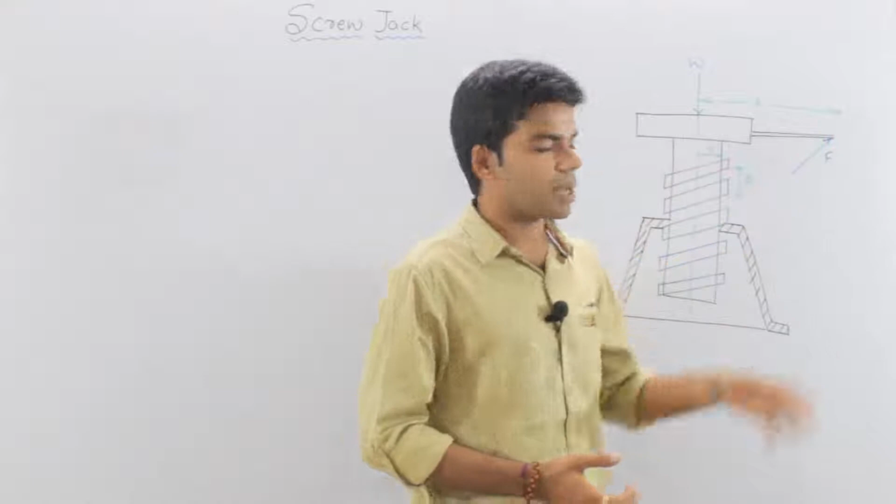So what actually is the screw jack and how is it working? We have a screw obviously, and these are the threads of the screw. We have a lever here and we are applying a force on this lever. So this screw will be turned and as a result, this will be lifted up, this will advance in axial direction in order to lift the load W.

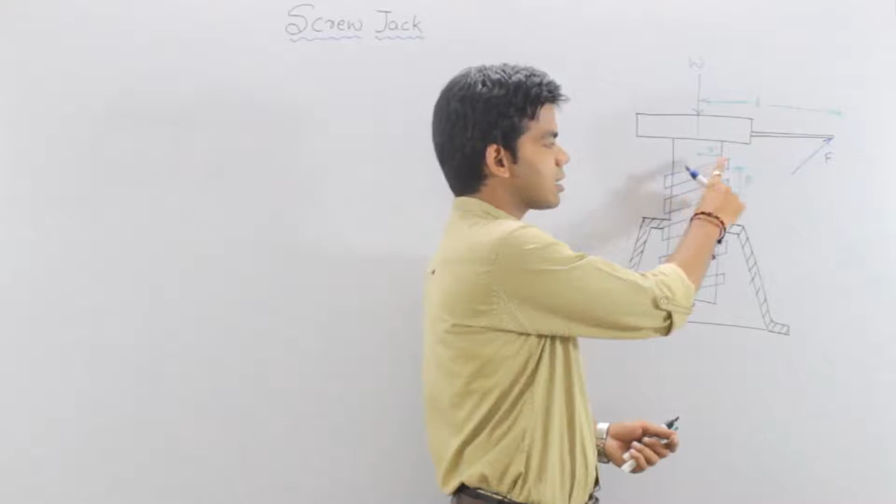Suppose the mean radius of this screw is small r, and the pitch of the screw is P. Now what actually is the pitch of the screw? The distance between the two threads is nothing but the pitch.

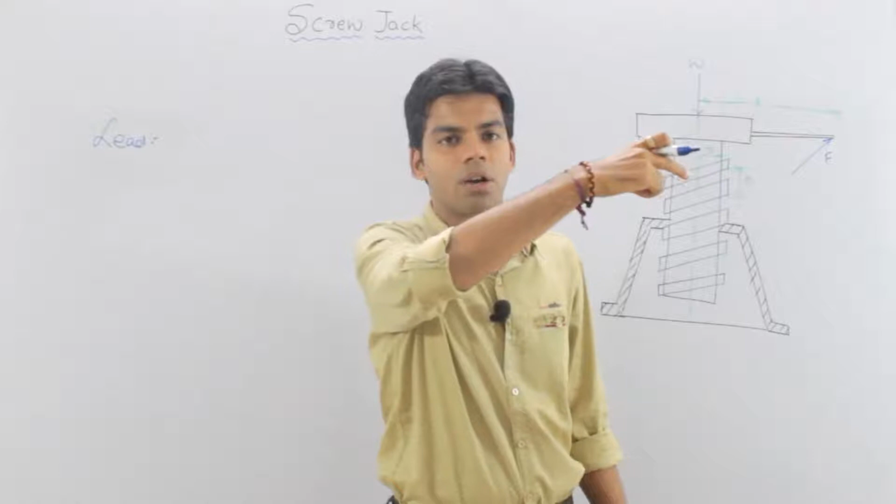There is another term called lead of the screw. These are two different terms. This term lead is often confused with pitch, but both are not the same. Lead is the axial advancement of the screw with one complete rotation of the screw. That means if I rotate this by a complete one rotation, 360 degrees, how much this screw will advance in axial direction, upward or downward, that is nothing but the lead.

Now you would say that the same thing is the pitch. Pitch is actually the distance between the two threads, and in case of a single headed screw, single start threads means a single thread is wrapped all over the screw. We also have a double start thread and single start thread, as we call them.

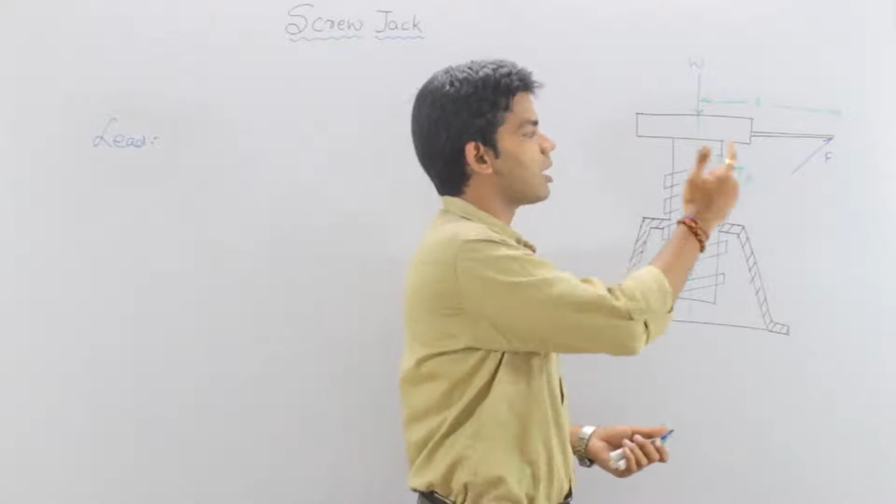In a double start thread there are two threads which are wrapped over the screw. In a single start thread only a single thread is wrapped over the screw. So in case of single start thread, this pitch will be equal to lead. Why? Because if I turn this by one complete rotation, the screw will advance in axial direction by an amount equal to one pitch, as I told you previously.

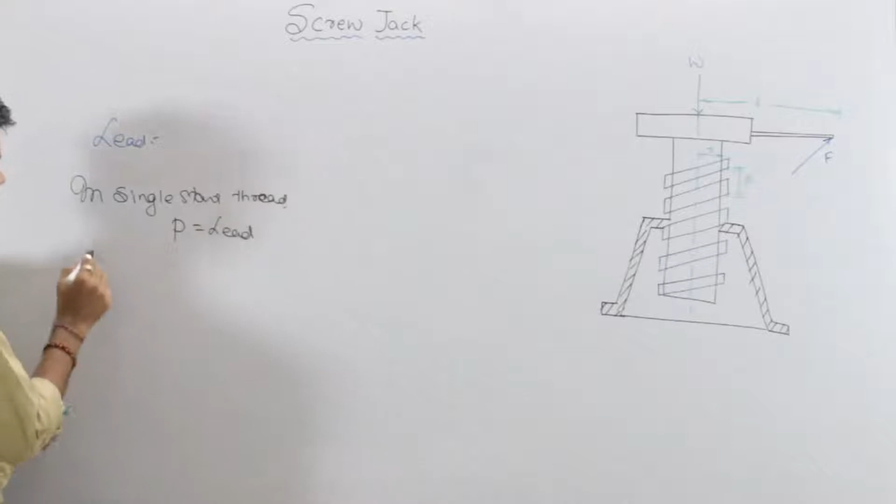But if we have a double start thread, then the total advancement of the screw in axial direction is nothing but 2 times the pitch, because there are two different threads. So in single start thread, pitch is equal to lead, and in double start thread, lead is equal to 2 times the pitch, not just the pitch.

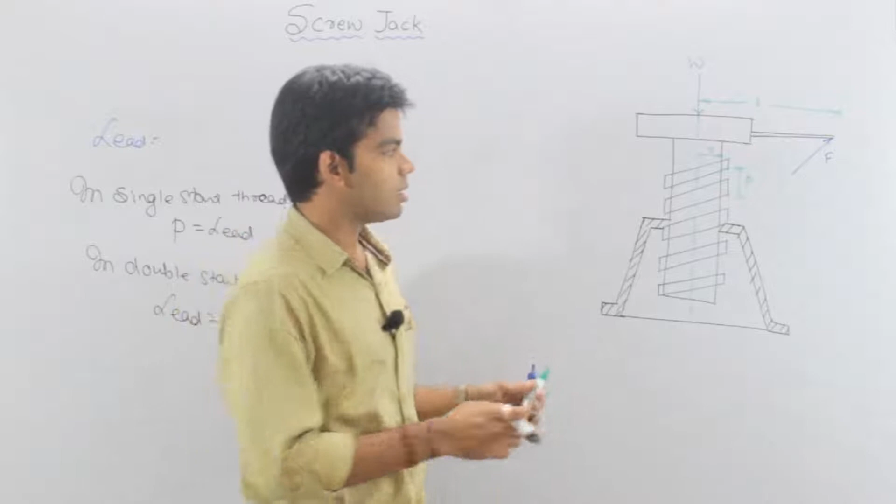Getting this or not? Now this screw jack works on the principle of inclined plane. If you can see here, we just have the inclined plane, and we are raising the weight with the help of this inclined plane only. So if I draw the free body diagram with this inclined plane, we have an inclined plane at an angle theta, and this theta is actually called the helix angle of the thread.

Theta is nothing but the helix angle of thread. So we have this inclined plane which is inclined at an angle theta, which is the helix angle, and we have a weight, suppose W, on this particular plane.

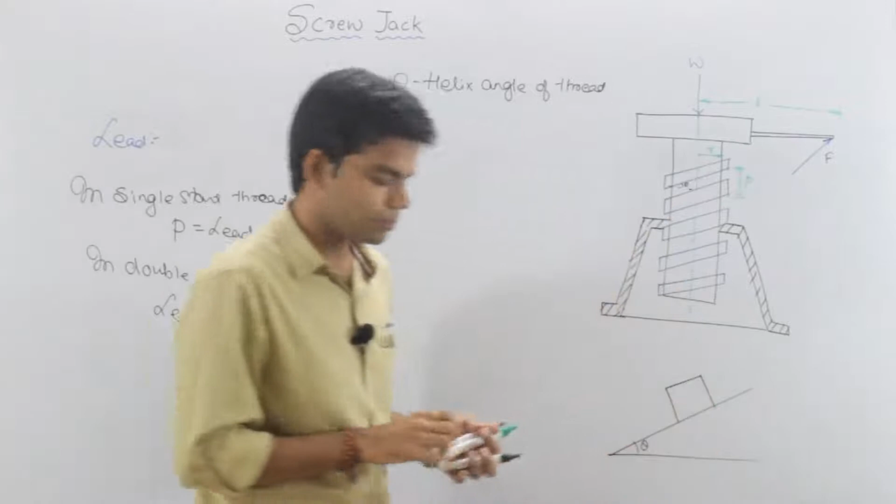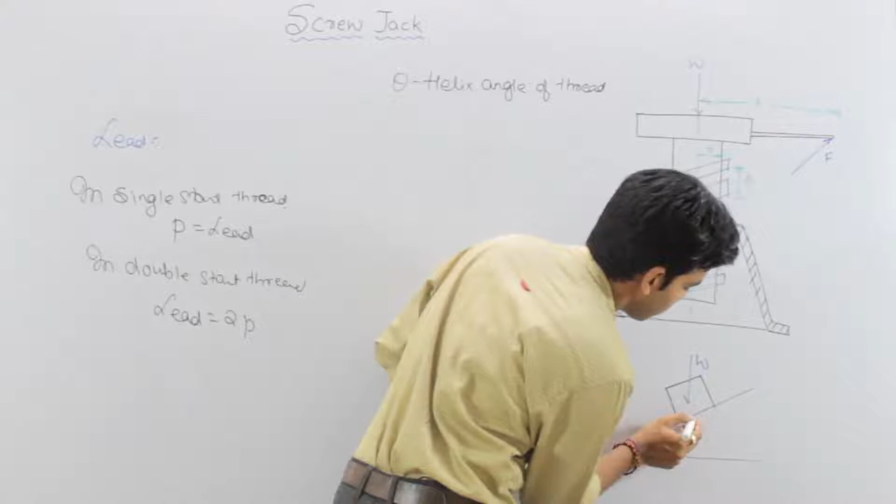W weight is acting. Now if I draw the free body diagram, the weight is acting vertically downward. The normal reaction will act normal to this plane, suppose N.

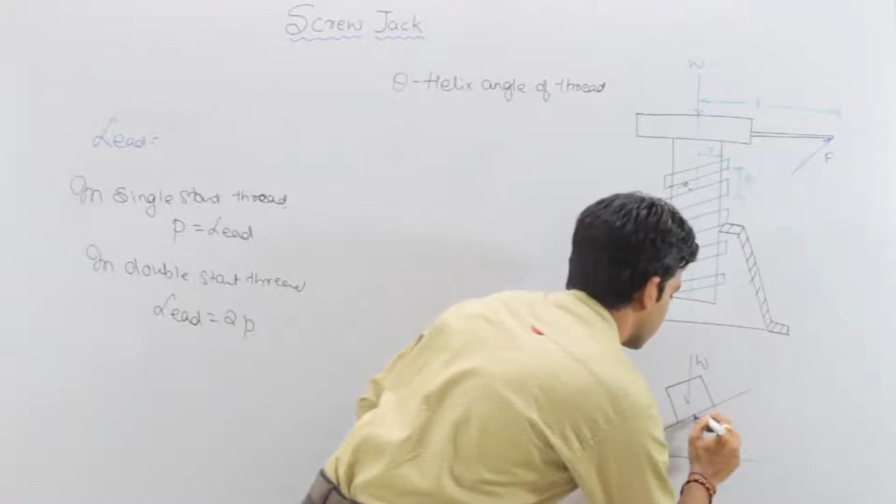And if the weight is advancing in upward direction, if we are lifting the weight, so the weight is getting lifted, so friction force will act in opposite direction. The magnitude will be equal to mu into N.

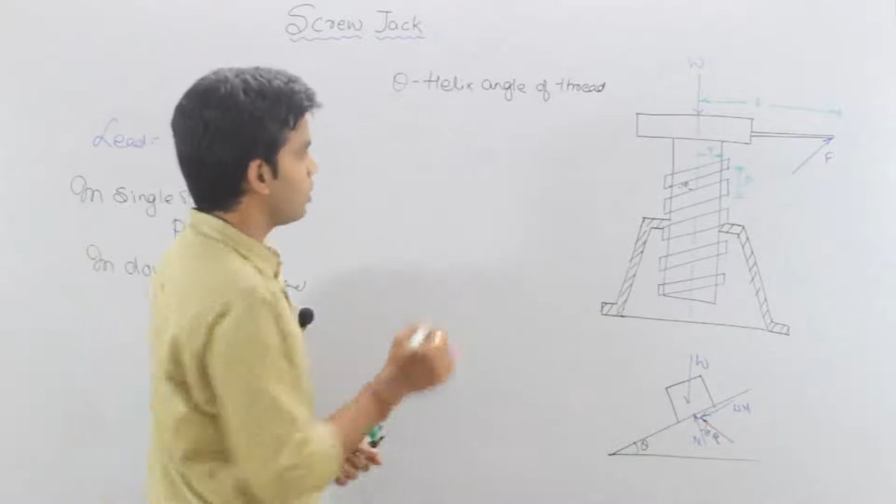And the resultant of these two, that means mu into N and N, the resultant of these two is nothing but R. And the angle which this R makes with the normal is nothing but phi, and we know that tan of phi is equal to mu, which is the coefficient of friction. We have already studied all these things in the friction unit. Or you can say phi is equal to tan inverse of mu.

Now apart from this, we are applying a force in horizontal direction.

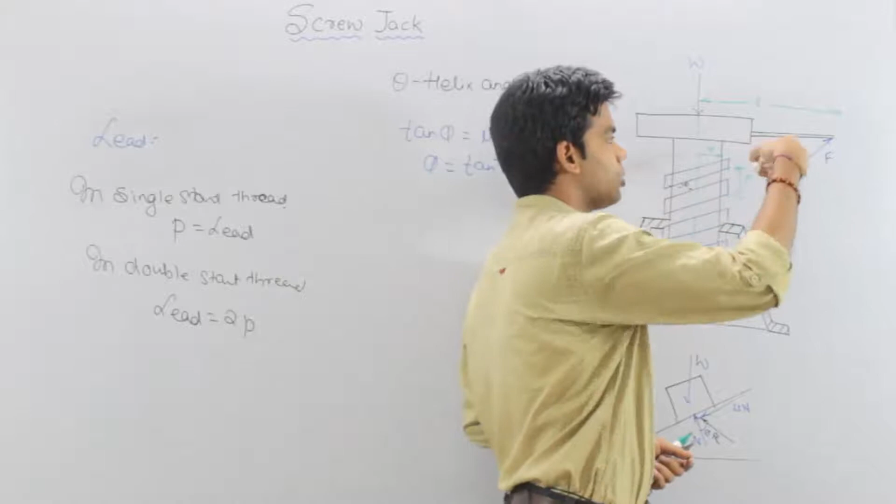If I consider the same force F at this particular radius r, let's suppose that force be P, let's suppose this force be P1.

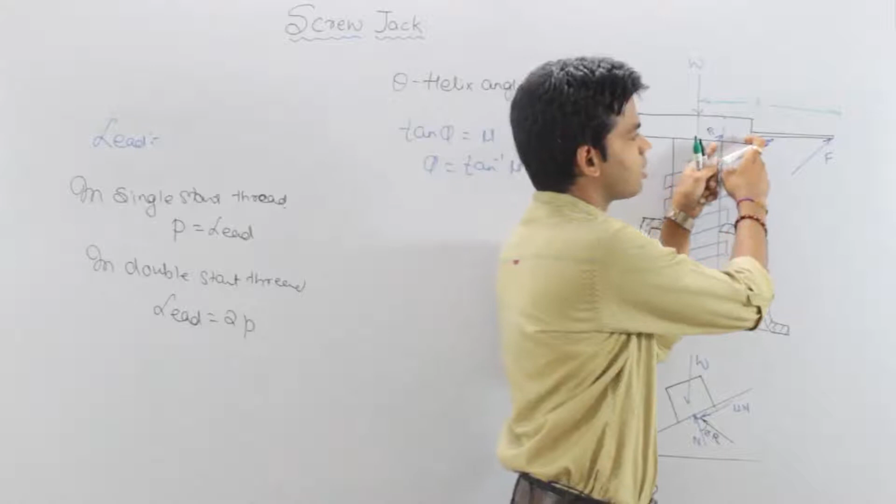I have just put a lever here and I am applying a force F so that the force be reduced. But actually the screw jack is only this much, so if I am applying a force here, suppose that force be P1. If I want to determine the value of this P1, this is simple to determine.

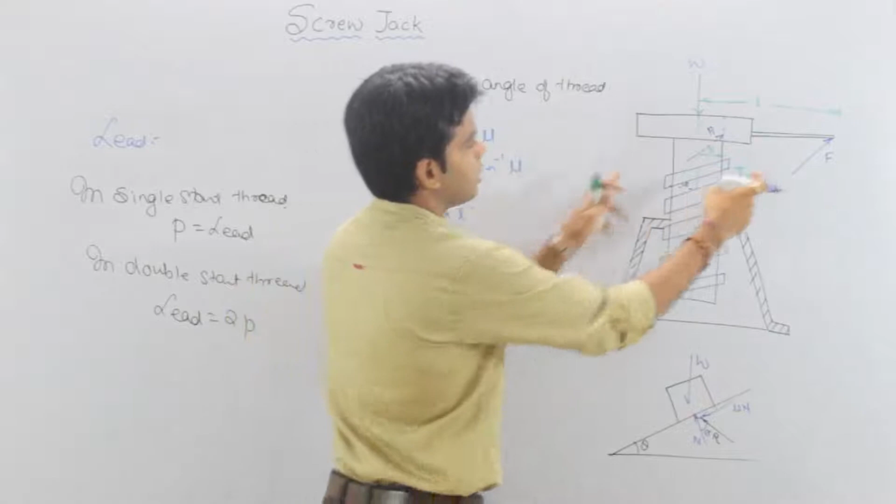So total moment about center is equal to F into L, and this should be equal to P1 into R.

The moment for both these forces should be equal. That means F into L should be equal to P1 into small r, or you can say from here P1 will be equal to F into L upon R.

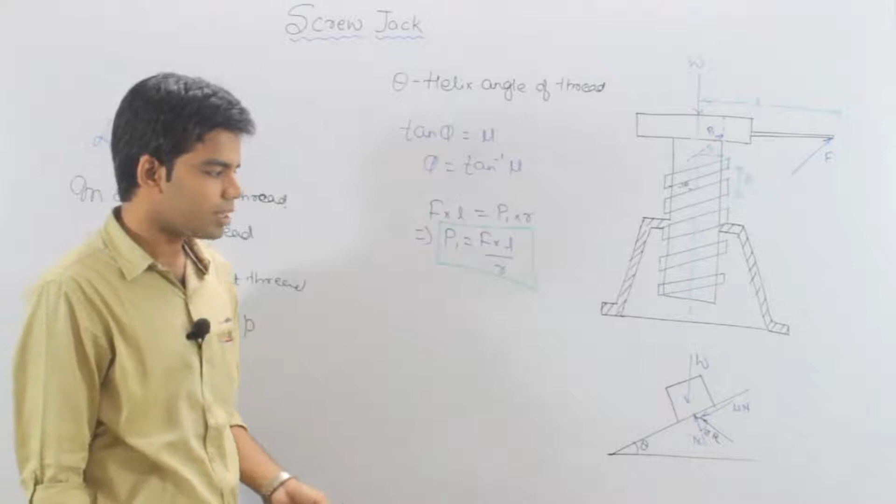So this is the value of the force if it is applied on the screw jack only. F is the force which is applied on the lever, P1 is the force which is applied on the screw jack. So we have one force also P1 which is acting in the horizontal direction like this.

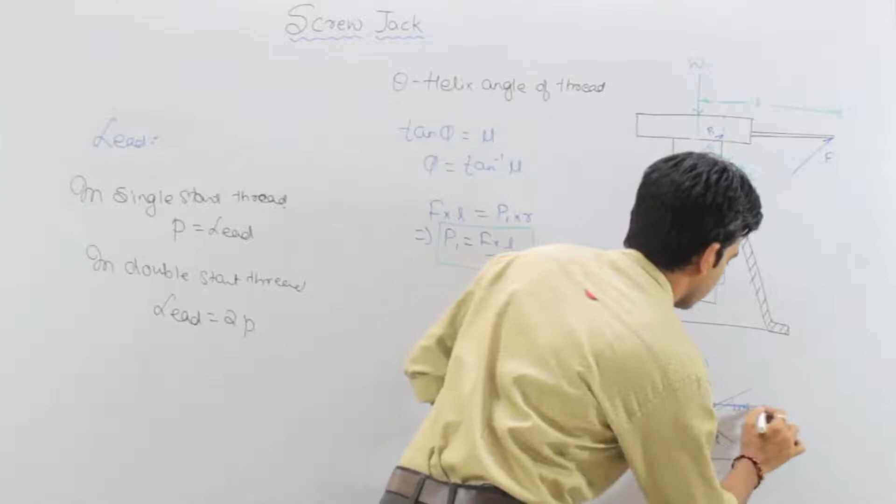This force P1 is acting in the horizontal direction like this. Now applying equilibrium equation.

Summation of Fx is equal to 0 and summation of Fy is equal to 0. Now what does summation of Fx is equal to 0 suggest? Now just look at here carefully.

This angle is theta, that means this plane is making an angle theta with horizontal. So the perpendicular plane, which is normal reaction, this will make an angle theta with the vertical. If this angle is theta, this angle will be theta.

Now what is summation of Fx is equal to 0? In this direction a force P1 is acting, in this direction a force R sine of theta plus phi is acting. This R will have two components, horizontal and vertical. Vertical component will be equal to R cos of theta plus phi, horizontal component will be equal to R sine of theta plus phi.

That means this P1 will be equal to R sine of theta plus phi. Summation of Fx is equal to 0.

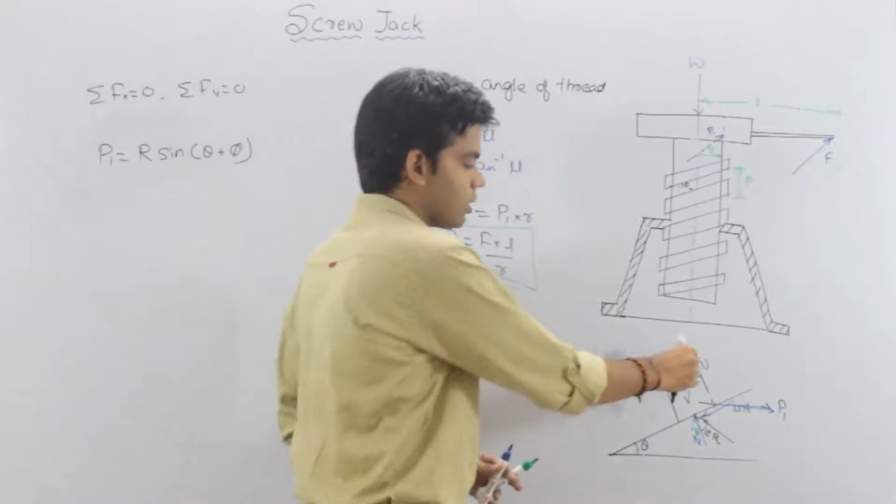Similarly, applying summation of Fy is equal to 0. We have W weight acting in downward direction and we have a vertical component of this R acting in upward direction. So from here this W will be equal to R cos of theta plus phi. This is equation number 1, equation number 2.

Now dividing these two equations, what we will get is P1 by W is equal to, R gets cancelled out and I will get tan of theta plus phi. Or you can say P1 is equal to W tan theta plus phi.

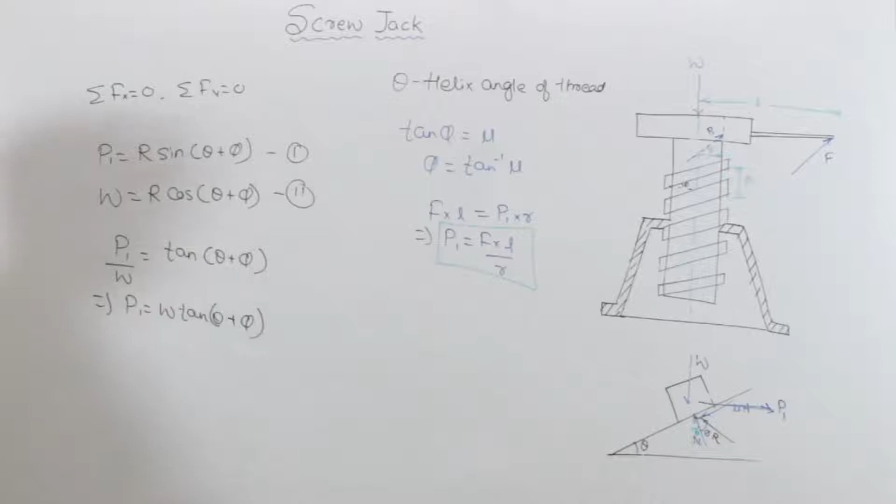Now if I want to determine the efficiency of this screw jack, what will be efficiency? As we know that efficiency is nothing but ideal effort applied upon actual effort applied. Ideal effort obviously will be less than that of the actual effort, so efficiency will be equal to ideal effort upon actual effort.

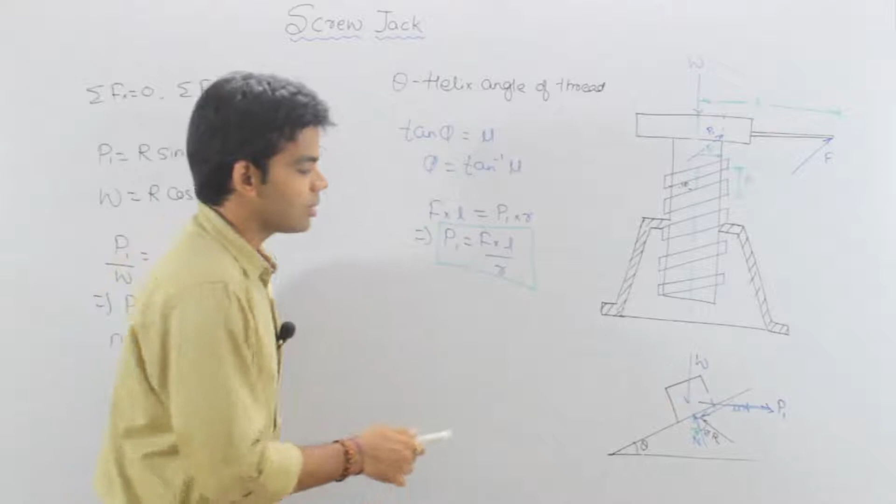What is ideal effort? If the effort applied, if the friction is not acting, then obviously this phi will be equal to 0. For P ideal, phi will be equal to 0, because mu is equal to 0. We are assuming that friction is not acting in case of ideal condition.

So this P1 will be equal to, or you can say P1 ideal will be equal to W tan of theta. And P1 actual, as we know, is equal to W tan of theta plus phi.

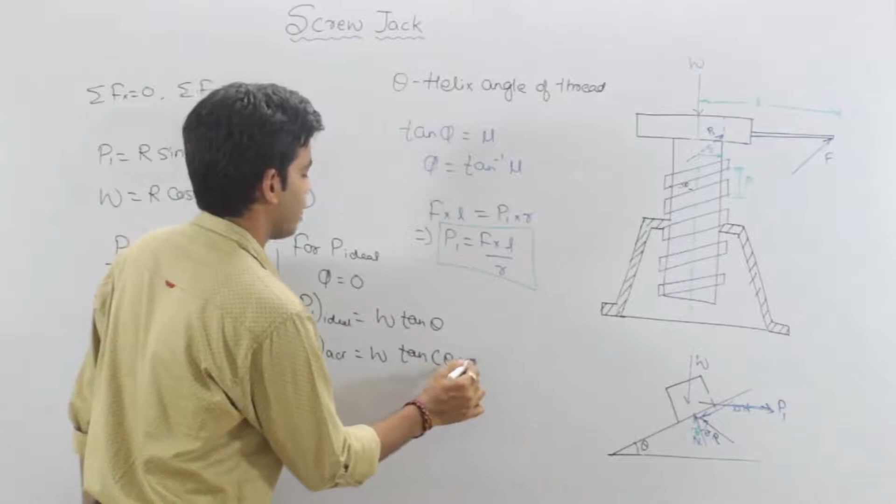So from here we can get the value of efficiency, which is P ideal by P actual. So this W gets cancelled out and we will get tan of theta upon tan of theta plus phi. So this is the formula for efficiency of the screw jack.

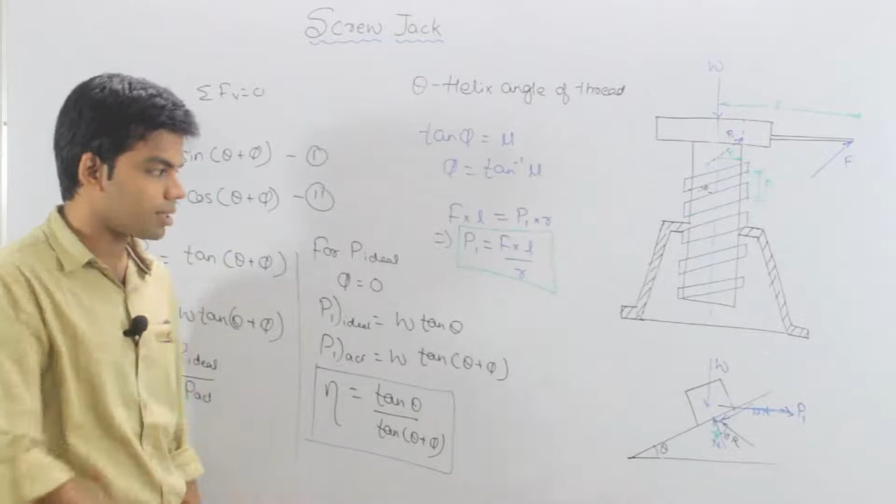Now if I want to determine the maximum efficiency, then what I will have to do is to differentiate this efficiency with respect to theta and equate it to 0, because the only variable here is theta.

So just for maximum efficiency, for eta max, d eta by d theta should be equal to 0. So just differentiate this, this will be equal to d by d theta of tan theta upon tan of theta plus phi.

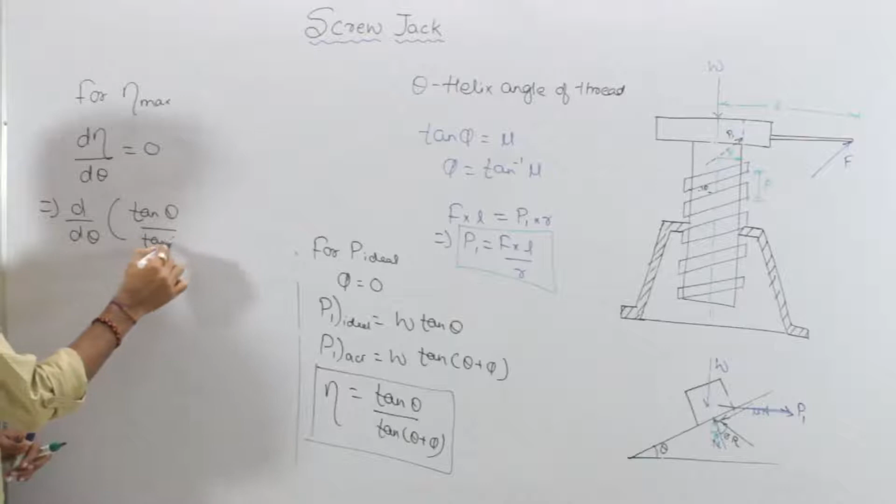This should be equal to 0, and from here we will get the value of theta. On solving this, we will get theta as pi by 4 minus phi by 2. This is the value of theta for which we get maximum efficiency. If I put this value in the formula for efficiency, I get the value for maximum efficiency: eta max equals 1 minus sine of phi upon 1 plus sine of phi. This is the maximum efficiency of a screw jack.

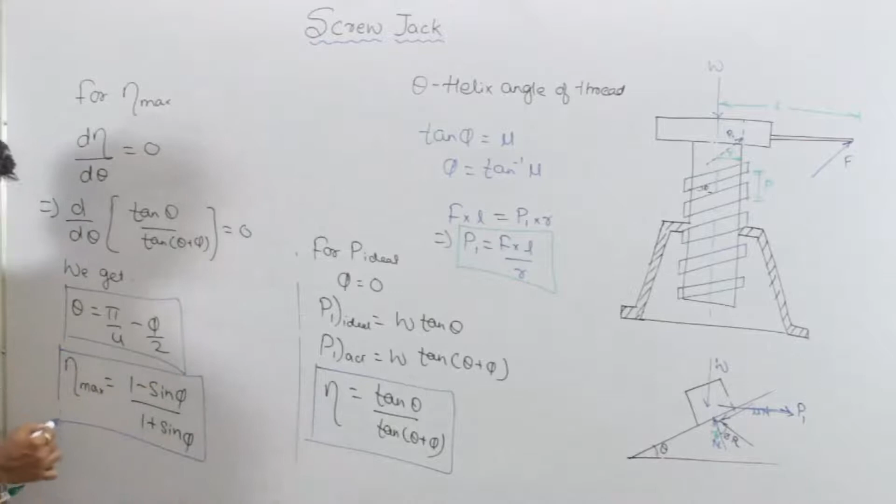Theta, as I told you, is the helix angle. Now what if the weight is getting lowered? For lowering of weight...

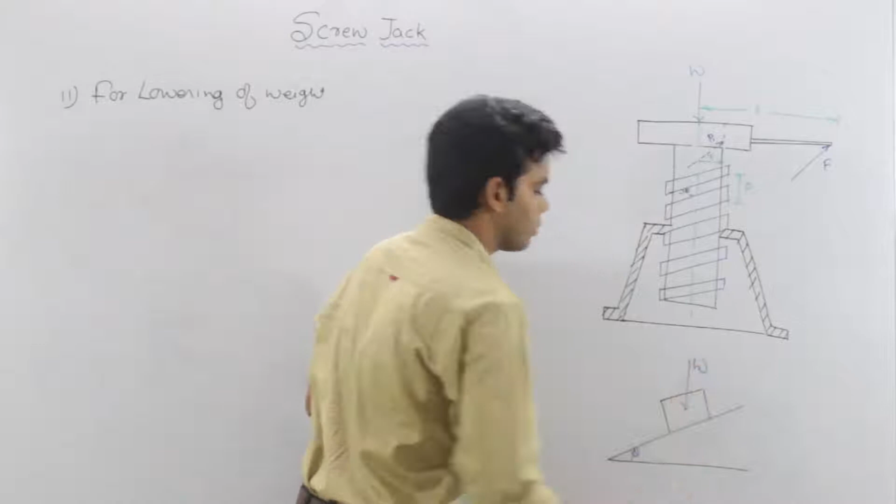Now what will happen if I draw the free body diagram here? So we have an inclined plane, as we have already discussed. This angle is theta, the weight acting is vertically downward, normal reaction acting in normal direction N. Now the weight is getting lowered, so because the weight is getting lowered, obviously the frictional force will act in the opposite direction. This angle is theta, so this angle will be theta, this angle will be theta. Friction force will be acting in the opposite direction, so this will be the direction of mu into N.

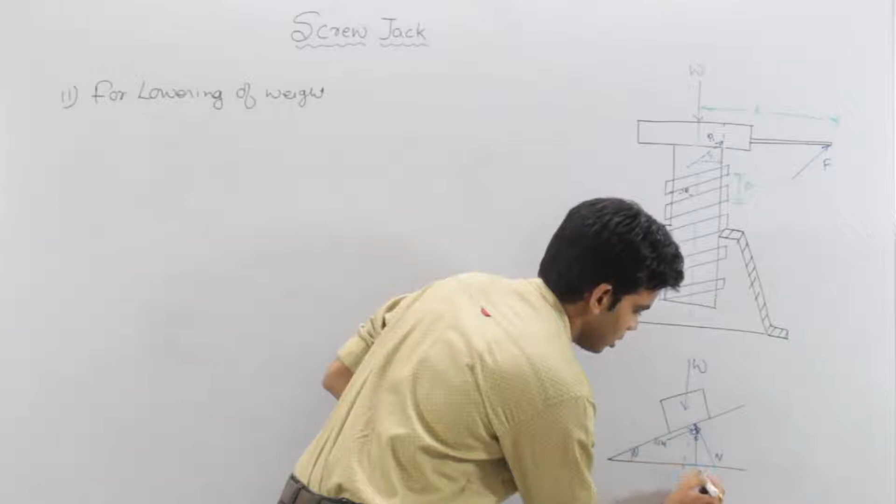Now what about the resultant? I will get the resultant somewhere around here. This is the resultant, and this angle will be equal to phi. The angle of N with vertical is theta, and the angle of N with R is phi. So don't get confused with this. Everything will be the same as discussed when the load was getting raised.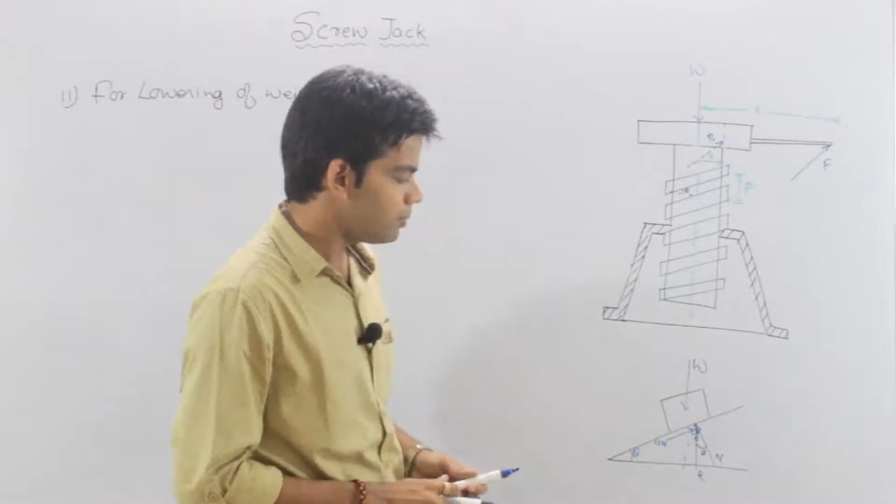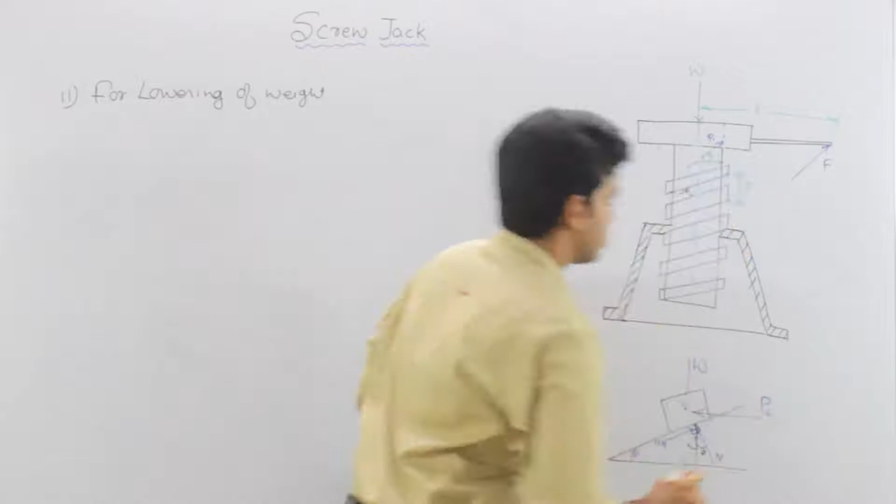Only difference is that now R will have two components. One will be vertical, which is R cos of theta minus phi. There it was R cos of theta plus phi, here it will be R cos of theta minus phi. This angle is theta minus phi. Similarly, horizontal component will be equal to R sine of theta minus phi. Obviously the direction of force will be opposite. So the force acting is suppose P2 for lowering the load, and we get the same result just with opposite sign. So this P2 will be equal to W tan of theta minus phi.

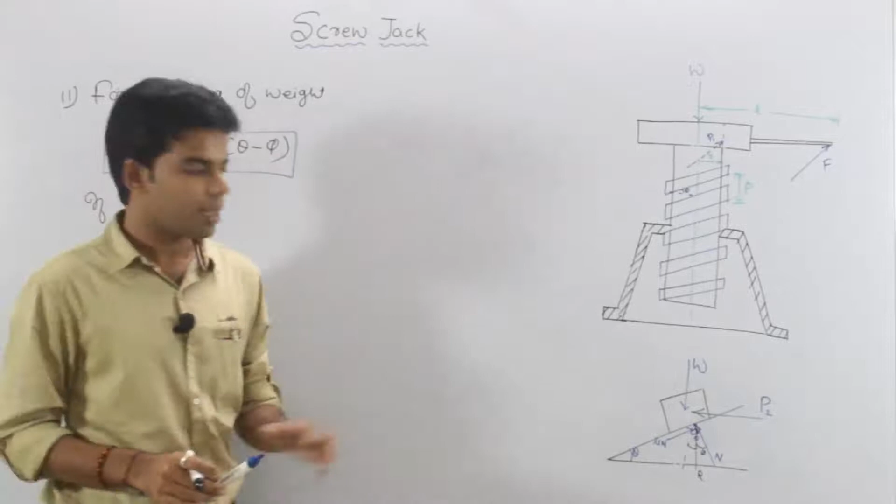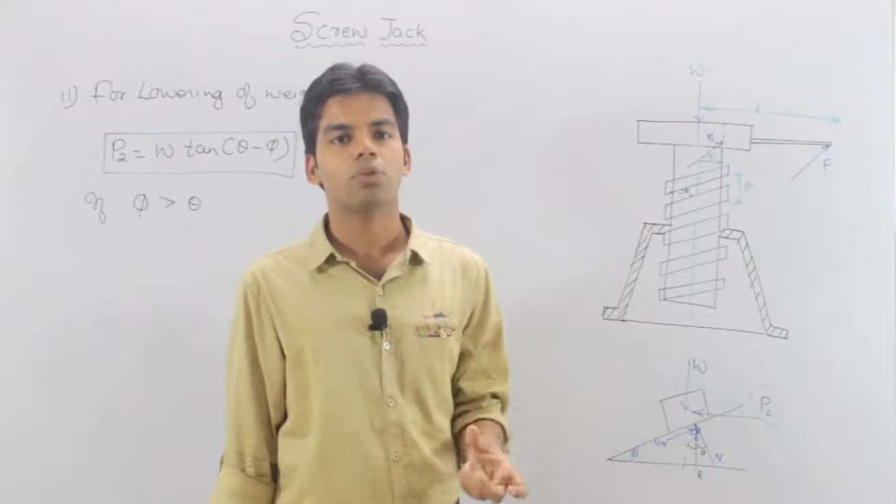Now what if phi is greater than theta? If phi, that means the friction angle, is greater than theta, what will happen? This P2 will be negative, meaning the direction of this P2 will be same as that of P1 which we discussed for raising the load. So obviously this will not be lowered because the direction becomes opposite. So this will not be lowered, or you can call it the self-locking machine.

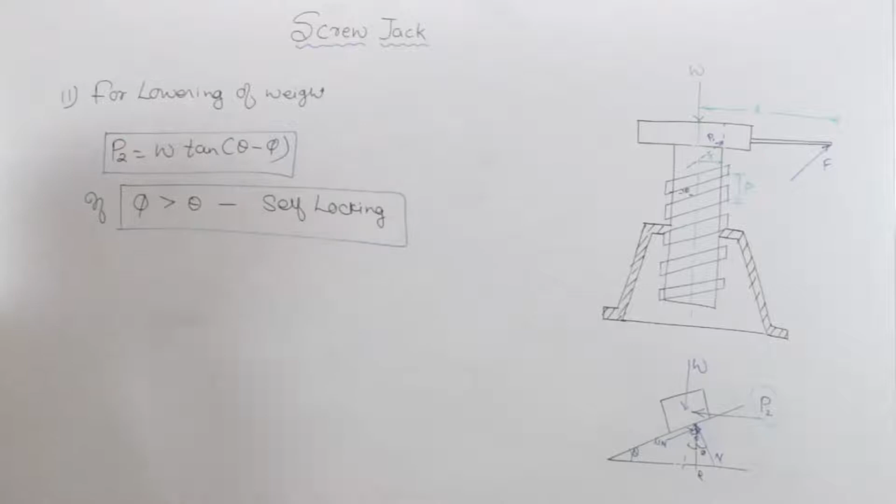So this becomes the condition for self-locking. If phi is greater than theta, then we can say that the screw is self-locking. Very important thing: if you want to check whether the screw is self-locking or not, just check the value of phi and theta. If phi is greater than theta, the screw is self-locking, and if it is less than theta, then the screw is not self-locking, it will be a reversible machine.

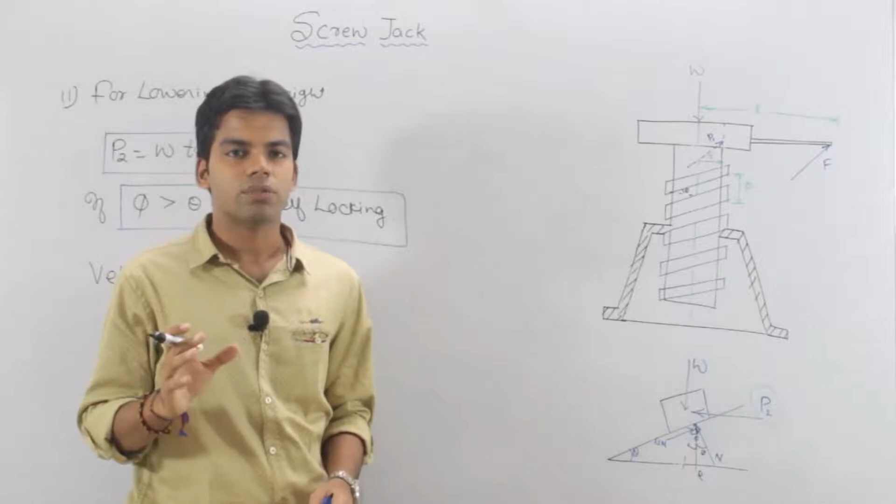Next, coming to the velocity ratio. Now what is velocity ratio? This I already told you while illustrating with the example of a car. Velocity ratio is nothing but the distance travelled by effort to the distance travelled by load. So what is distance travelled by effort? The effort we are applying is F.

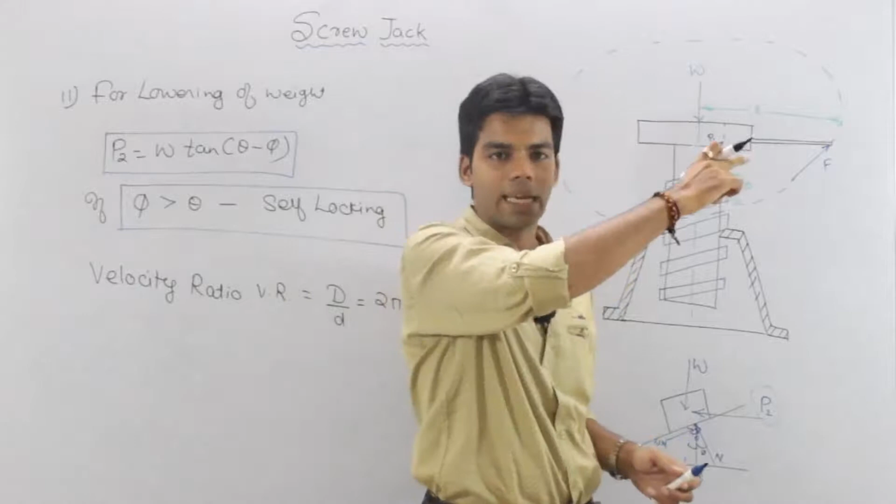The total distance travelled is nothing but 2 pi L, the radius is L, so the total distance travelled is 2 pi L, capital D by small d, or this can be written as 2 pi L. While this is covering the distance of 2 pi L, this screw will raise by an amount p, considering a single-threaded screw. So this will be equal to 2 pi L upon p. This is nothing but the velocity ratio of this screw jack, 2 pi L by p.

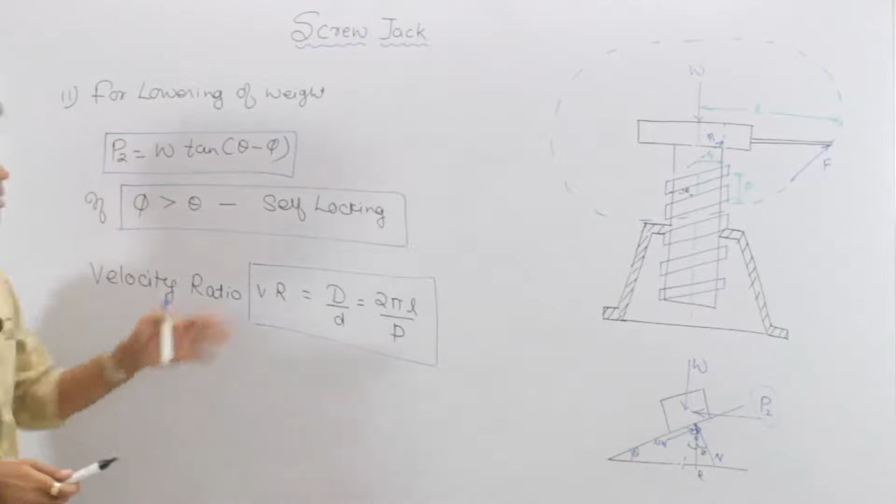Clear or not? Okay. Now what if I want to determine the value of F? We have the value of P1, and if we want to determine the value of F, that means a force which is to be applied on a lever of length L. What will be that force now?

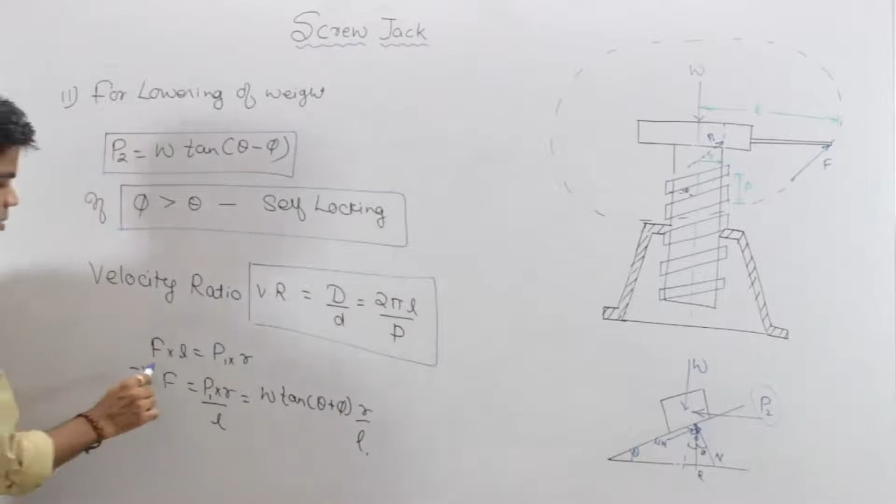We have already discussed that F into L should be equal to P1 into small r. So F is equal to P1 into small r upon L. This will be equal to W tan of theta plus phi into r by L. So this much force is required in order to lift the load W on the lever which is of length L. Getting this or not? Okay.

So we will solve some questions now. First question: a simple jack has threads of pitch 5 mm and handle of 45 cm length. Find the velocity ratio if an effort of 100 Newton applied at the end of handle lifts a load of 12,000 Newton. Find the efficiency of jack.

So what is the question saying? We have a simple jack whose pitch is 5 mm, the length of the handle is 45 centimeter, refer that figure. We have to determine the velocity ratio. So what will be the velocity ratio? This will be equal to 2 pi L by p, as I told you. So this is equal to 2 pi into 45 divided by pitch, which is 5 mm.

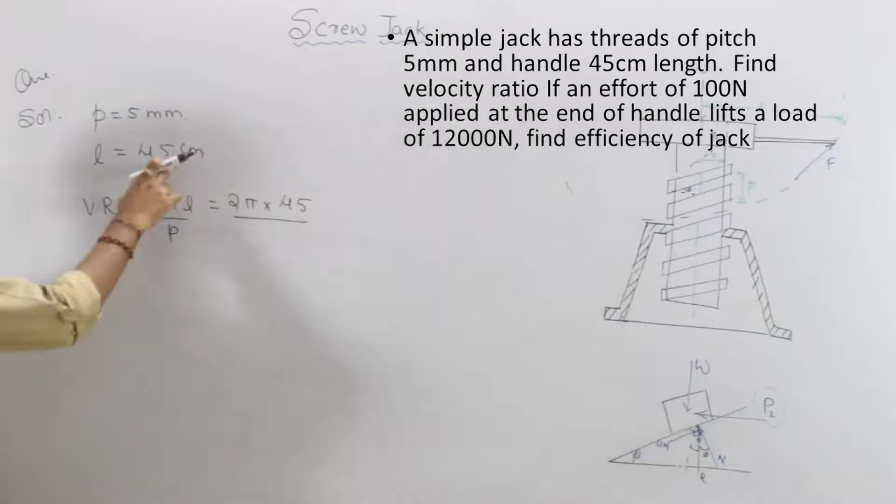In terms of centimeter, this will be equal to 0.5 centimeter. So this is equal to 565.4. This is velocity ratio, first answer.

Second, it is asking about the efficiency. So what will be the efficiency? Efficiency is nothing but mechanical advantage by velocity ratio. Mechanical advantage is load per unit effort upon velocity ratio. The load given is 12,000 Newton and effort we are applying is 100 Newton, by 565.4. This will be equal to 21.22%, answer.

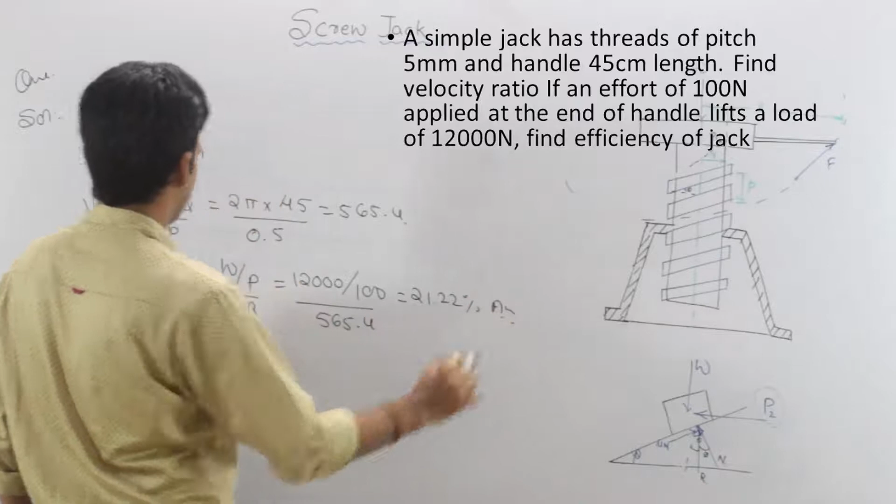Okay, so very simple question. We just had to determine the velocity ratio and efficiency. Clear or not? Okay, another question.

So next question. A screw jack having square threads of mean diameter 6.25 centimeter and pitch of 12.5 mm has a coefficient of friction mu of 0.05. Find first the tangential force which should be applied at the end of a 30 centimeter long handle to raise a load of 5000 Newton. Second, is it self-locking? If not, find the torque required to keep the load from descending.

Okay, so we have a screw jack. What are the given figures? The mean diameter small d is given as 6.25 centimeter. The pitch is given as 12.5 mm. Coefficient of friction mu is given as 0.05.

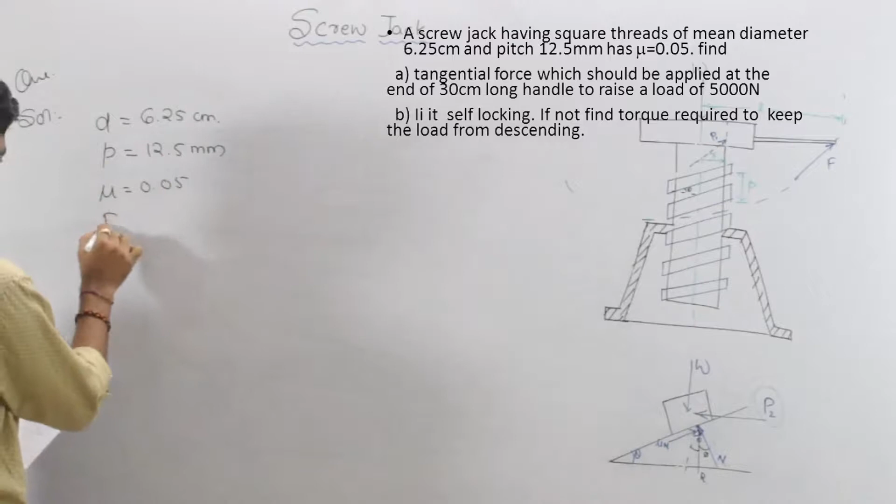We have to determine the tangential force, that means we have to determine F, applied at the end of a 30 centimeter long handle. That means the length of the lever L is given as 30 centimeter, to raise a load of 5000 Newton, that means the load W is given as 5000 Newton. Clear or not? Okay, so we have to determine the total force which is to be applied at the 30 centimeter long handle in order to lift the load of 5000 Newton.

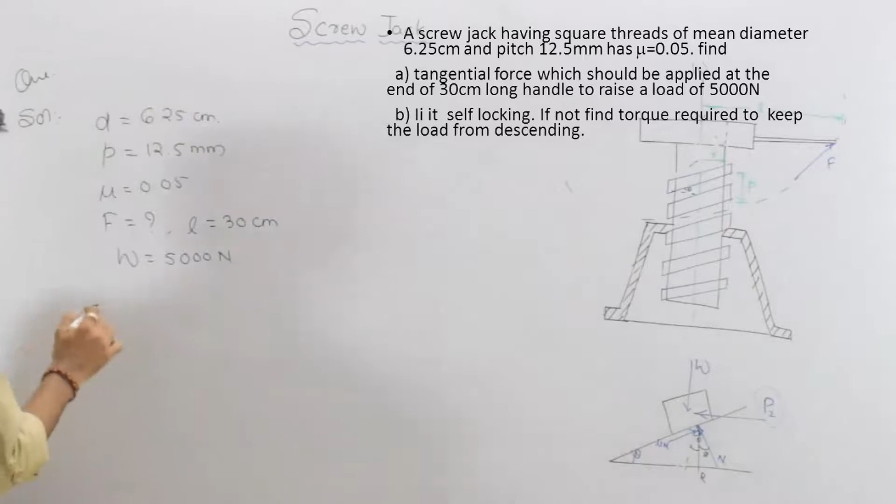Okay, so we have already determined the value of P1 in order to lift this load. This P1 is equal to what? W tan of theta plus phi. Okay, now the first thing is to determine the value of theta. Now how can we determine the value of this theta?

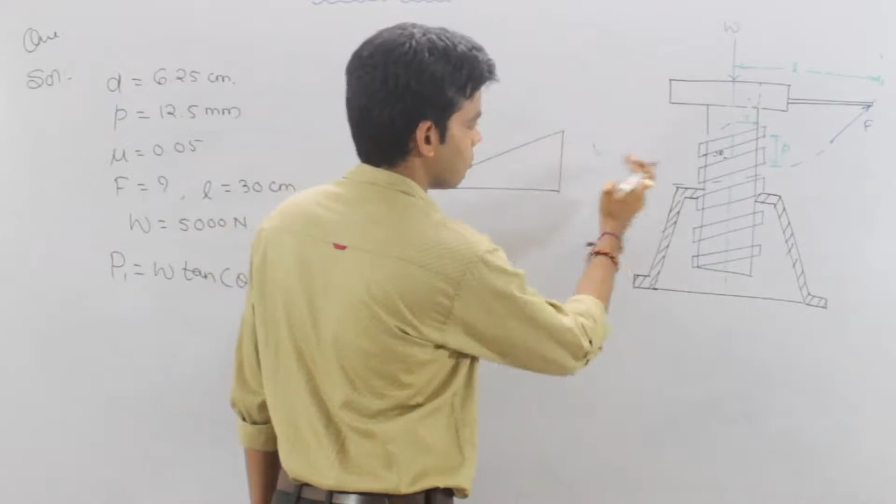So now we considered this inclined plane. This was our inclined plane. For one complete rotation we just consider the thread of one complete rotation, and with one complete rotation the vertical advancement of the screw is P, which is equal to pitch. And this total length is nothing but the circumference, so this is nothing but 2 pi r, or you can say pi into d. This angle is theta. Getting this or not? Okay, so from here I can determine the value of theta.

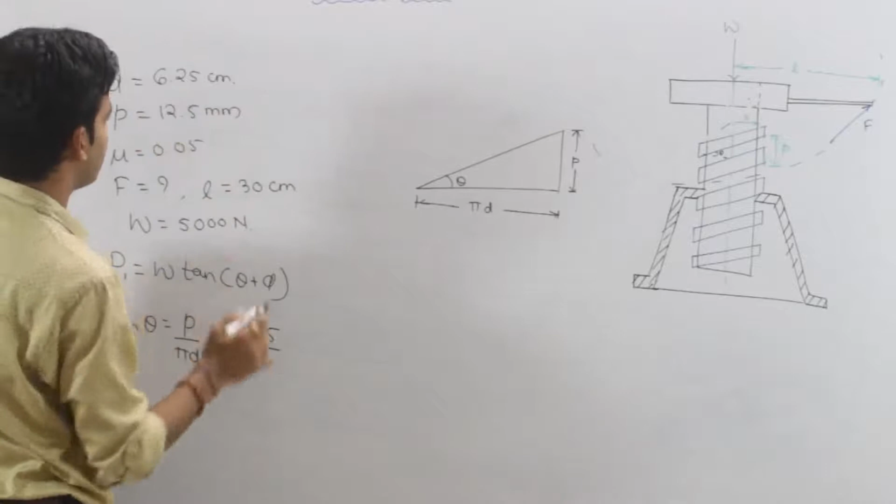So how can we determine the value of this theta? Tan of theta is equal to perpendicular upon base, P upon pi into D. Okay, so just put the value: P is 12.5 in mm by pi into D in mm, which will be 62.5 mm, that is 6.25 centimeter. So from here you can get the value of theta, and this theta will be equal to

3.64 degree, first thing. Second, we have to determine the value of phi. This phi also we can determine. How? We have the value of mu, and as I told you, this phi is equal to tan inverse of mu. Okay, mu is given as 0.05. So from here this phi will be equal to 2.86 degree.

Okay, so now you have the value of theta, phi, and w, so you can determine the value of P1. This P1 will be equal to 5000 tan of theta plus phi, which is 3.64 plus 2.86. So from here P1 will be equal to 569.8 Newton. Getting this?

But we don't have to determine P1, we have to determine the value of this F. So how can we determine this? F into L is equal to P1 into R, or you can say D by 2. So from here F is equal to P1 D upon 2L.

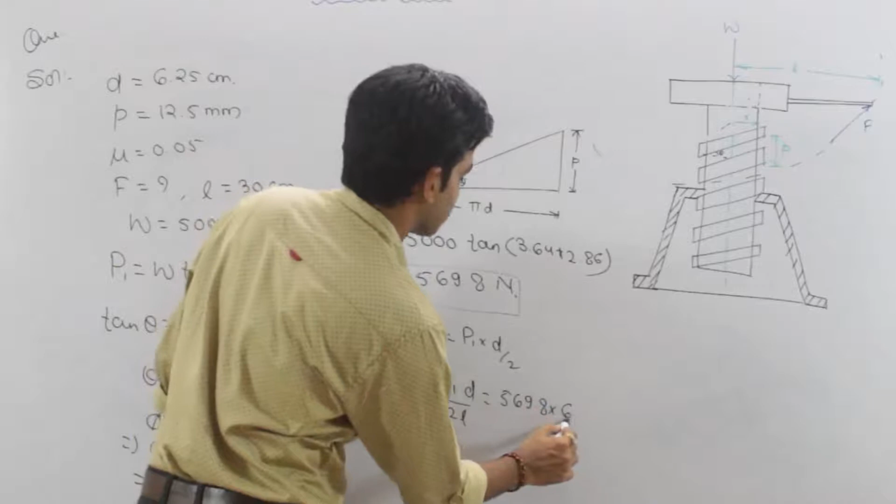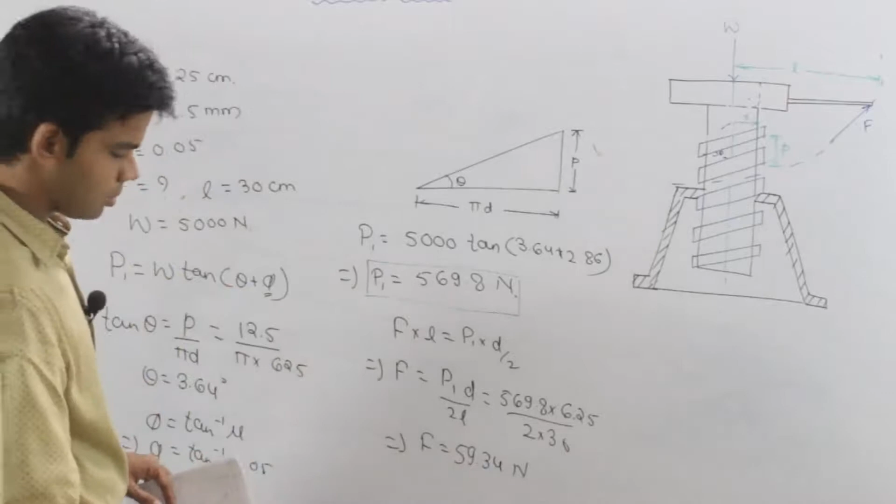So just put the values. This will be equal to 569.8 into diameter, which is given as 6.25 centimeter, and length is also given in centimeters, so no need for conversion. So this will be equal to 6.25 divided by 2 into 30. From here this force is equal to 59.34 Newton. So this much amount of force is required to be applied at the end of the 30 centimeter long lever or handle. Getting this or not?

Now what does the second part say? It's asking whether this is a self-locking device or not, and if it is not a self-locking device, then we have to determine the torque required to keep the load from descending.

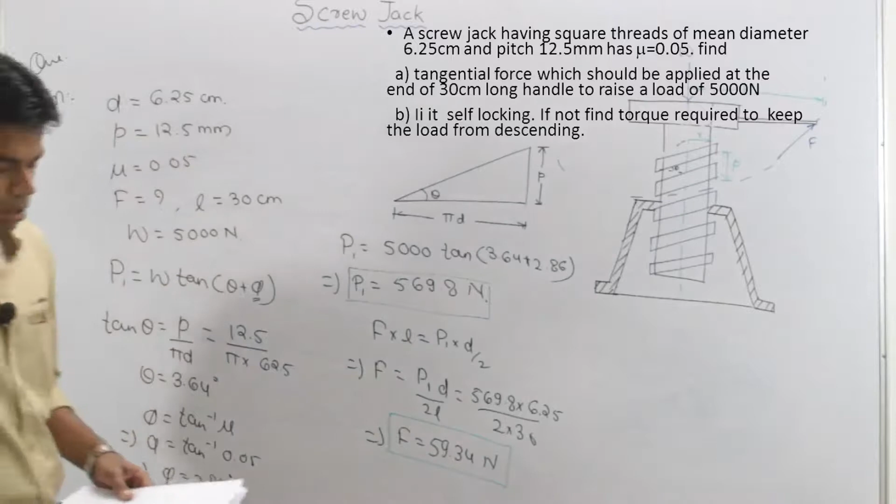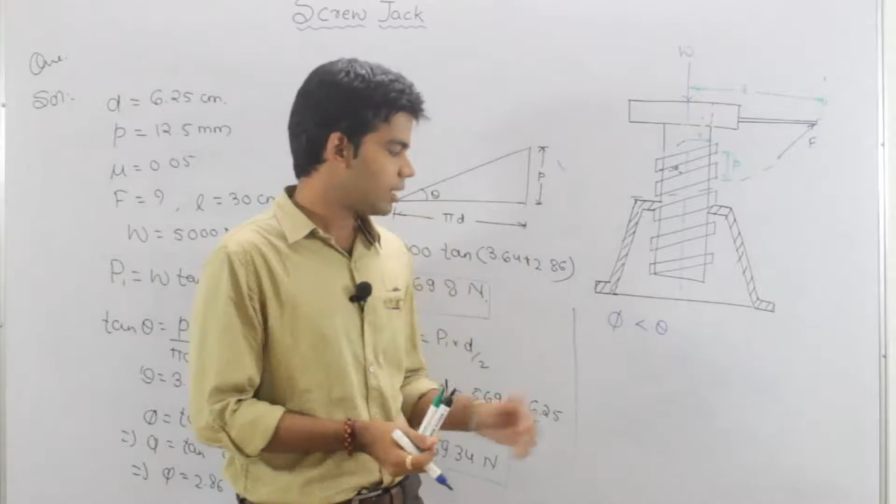So first thing is to check whether it is self-locking or not. As I told you, just check the value of theta and phi. In this case, since phi is less than theta, and the condition for self-locking is that phi should be greater than theta, since phi is less than theta here, this is not a self-locking device.

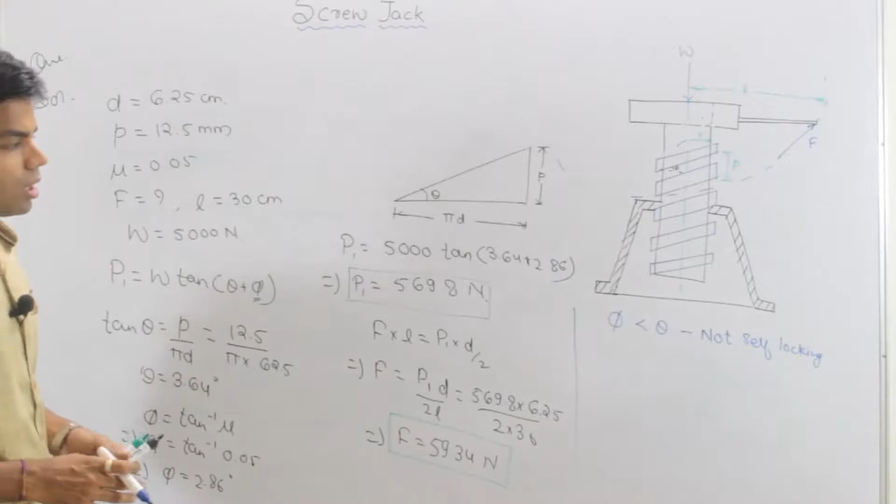So since this is not a self-locking device, we have to determine the minimum torque required in order to not let this screw go downward, that means in order to prevent it from descending. Clear or not? So how much force is actually applied while descending of this screw?

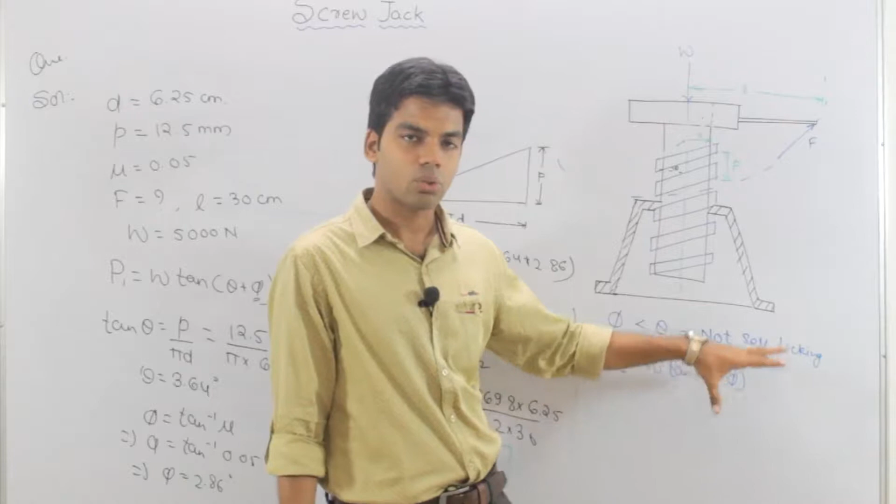That's the P2 force, as I told you, and P2 is nothing but W tan of theta minus phi. This much amount of force was actually required to descend this screw. So from here we can get the value of P2: W is given as 5000 Newton, so P2 equals 5000 into tan of theta minus phi, which is 3.64 minus 2.86.

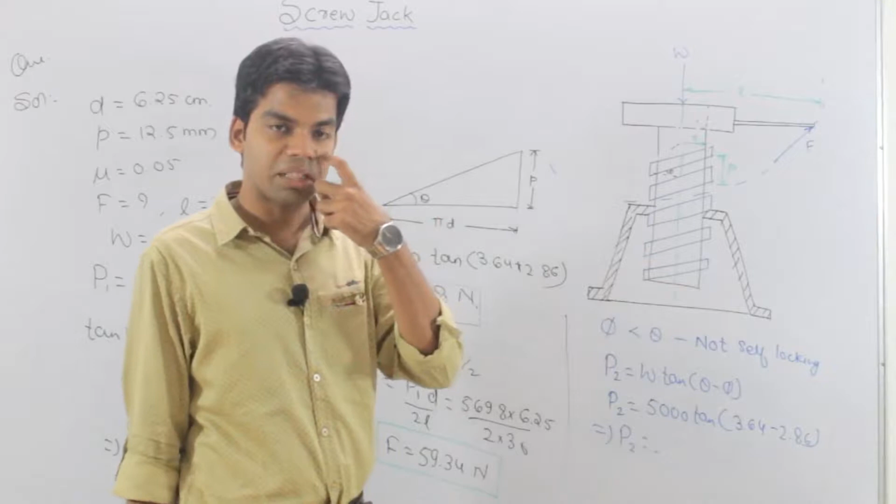So this P2 is actually the force applied in the opposite direction in order to descend this load, and if we want to prevent that descending, we will have to apply a force in the forward direction again, in the direction of P1. So we want to determine the minimum amount of force required in order to prevent this screw from descending. Getting this or not? So whatever torque this P2 force is applying, we should apply at least that much torque in the forward direction in order to prevent it from descending.

So how much torque is this P2 applying? The minimum amount of torque, T, will be equal to P2 into the distance d by 2. Getting this or not? So just put the value: this will be equal to 5000 tan of 3.64 minus 2.86 into d by 2, which is 6.25 by 2 into 10 raised to power minus 2, in terms of Newton meter. So from here this will be 2.12 Newton meter.

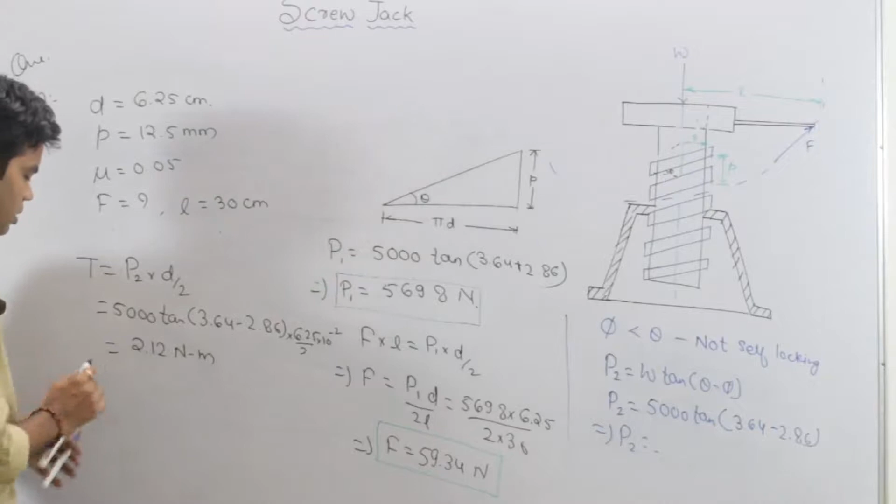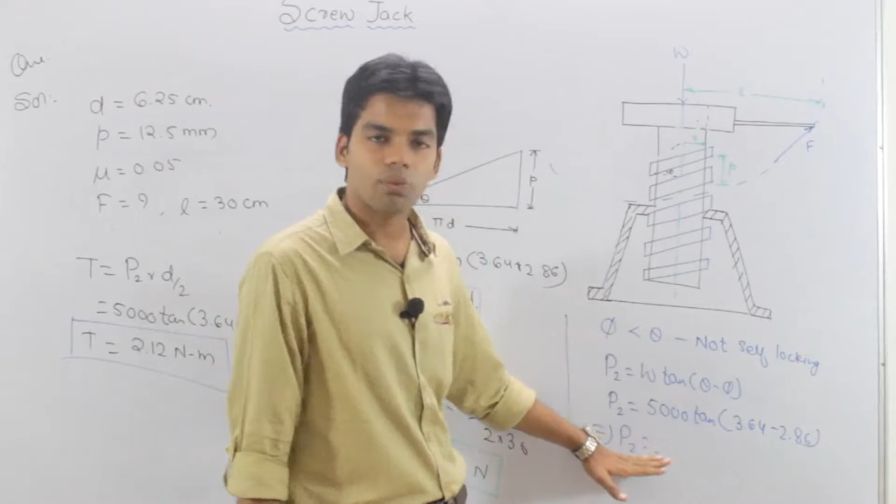So this is actually the torque which is applied while moving downward. So if we apply this much torque in the forward direction, obviously the screw will not lower, it will stay in its original position. We are not raising the screw further, we just have to prevent it from lowering. So what we did was determine the force being applied while lowering, and this much torque was getting produced. So at least this much forward torque we should apply in order to prevent this from lowering. Getting this one? Okay.

Okay, so we have this next type of lifting machine which is wheel and axle. So what is this wheel and axle?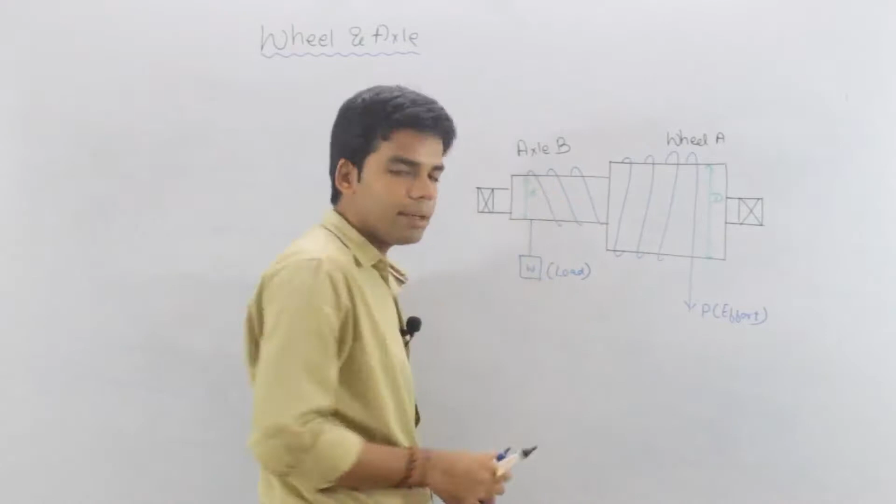We have this arrangement, a wheel and an axle, and threads are wrapped on this wheel and axle. How are the threads wrapped? Such that if the thread on the axle is getting wound, the thread on the wheel will get unwound, and vice versa. You can see the direction of these threads. The direction on wheel and axle will be the same, but if this is getting unwound, that will be wound, and if this is getting unwound, that will be wound.

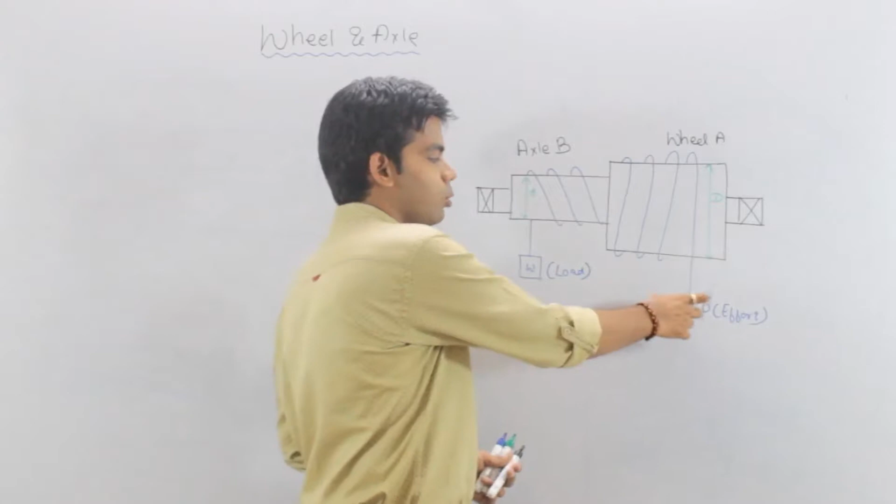So the diameter of the axle is less, and the diameter of the wheel is more. I have to lift this weight W up, and I am applying an effort P on the thread at the end of the wheel. One end of this thread is attached to the effort, and the other end is attached to the wheel. Similarly, one end of this thread is attached to the load to be lifted, and the other end is attached to this axle. So this is the whole arrangement.

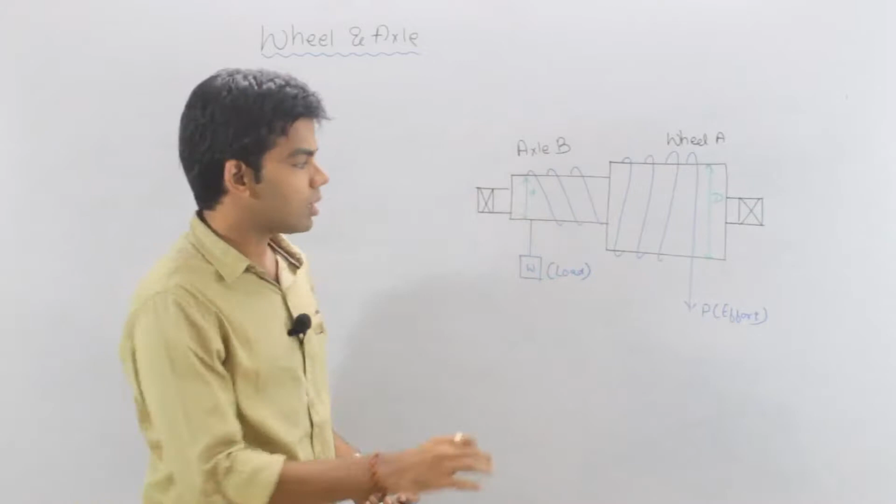Now what is special about this arrangement? I will tell you. What is the velocity ratio of this particular arrangement? Velocity ratio is the distance travelled by effort to the distance travelled by load.

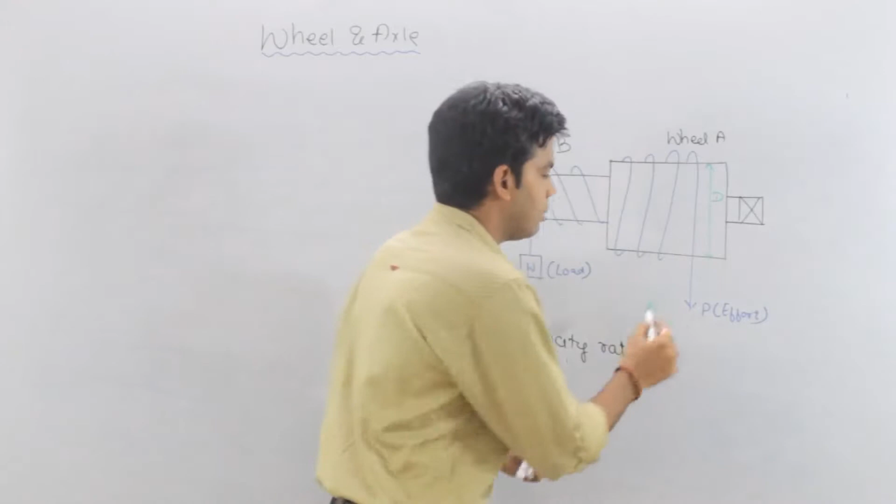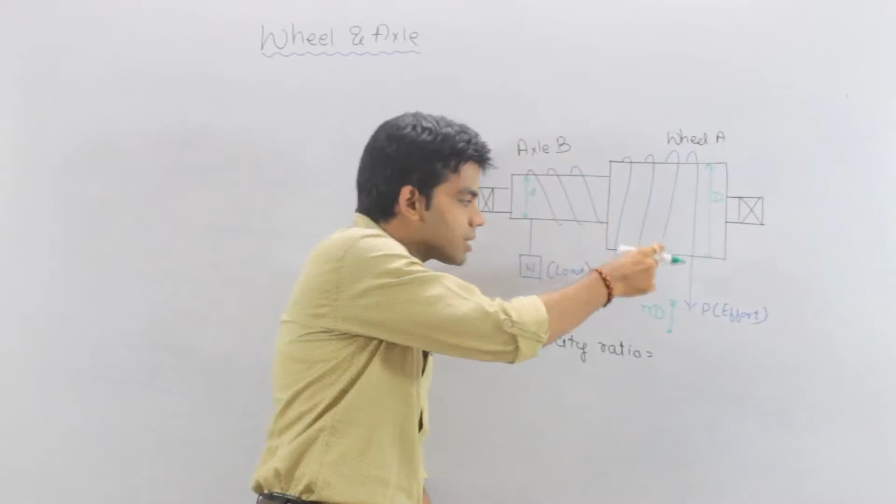For one complete revolution of the wheel and axle, the effort will move by a distance equal to the circumference of the thread wrapped on the wheel, which is pi into capital D. For one complete revolution, this much thread will be unwound, and as this thread is unwound, the thread on the axle will be wound up, raising the weight. This weight will be raised equal to the circumference of the thread on the axle, which is pi into small d.

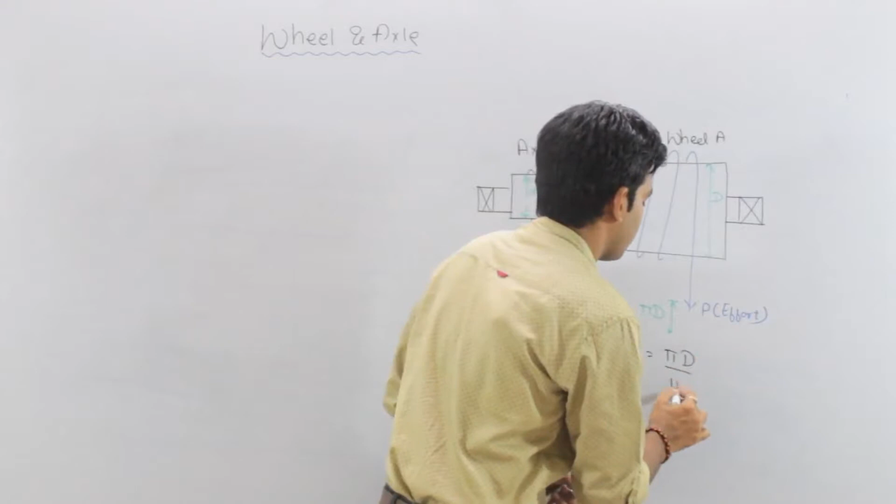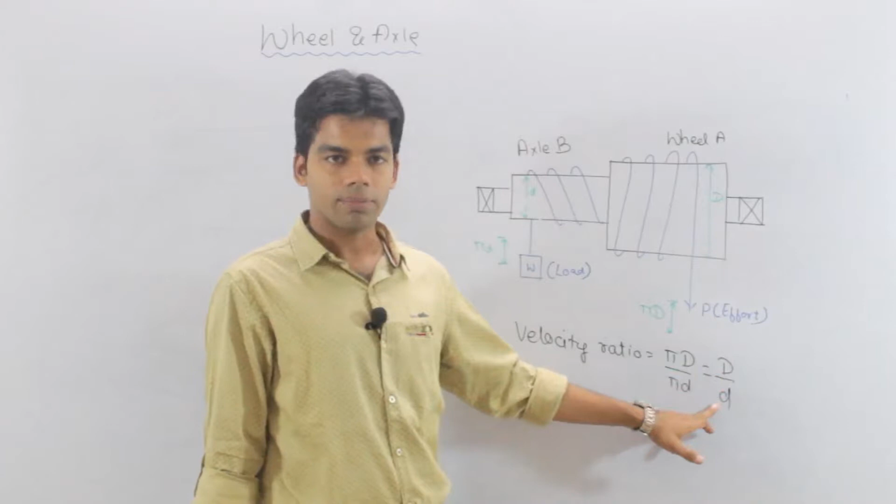So this velocity ratio will be equal to pi into capital D upon pi into small d, or capital D by small d, where capital D is the diameter of the wheel, the bigger diameter, and small d is the diameter of the axle, the smaller diameter. Since capital D is greater than small d, this velocity ratio is obviously greater than 1. And if it is an ideal machine, the mechanical advantage will be equal to velocity ratio, since efficiency is equal to 1, and this will be equal to capital D by small d, which is greater than 1.

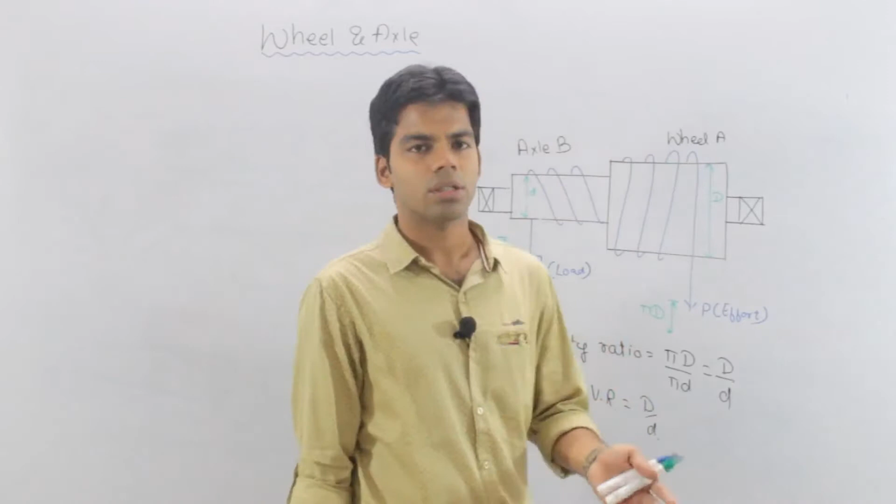This means less effort will be required to lift more load. You have already seen this in your engineering mechanics lab. I will show you the video also - you can see here. If an effort is applied on the thread on the wheel, you can see that the string on the wheel will be unwound, and the string on the axle will be wound, raising the weight. I think you have recalled what you did in the engineering mechanics lab. So this is nothing but the wheel and axle arrangement.

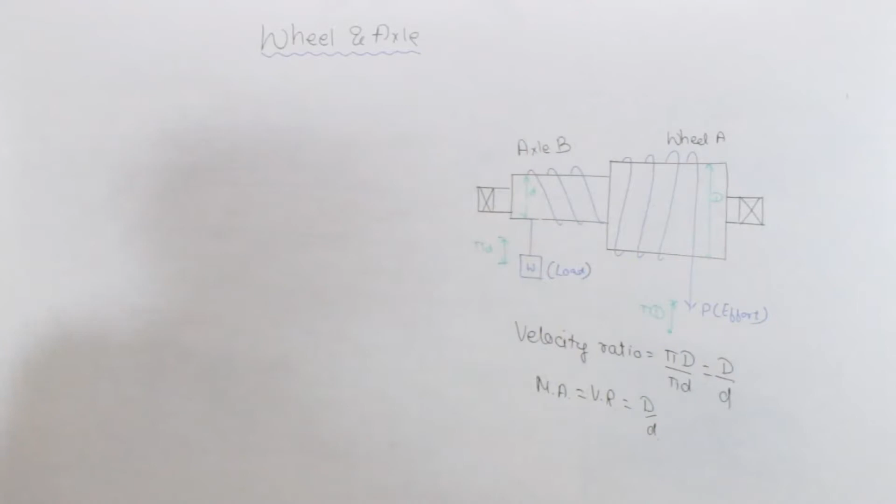Next is the differential wheel and axle.

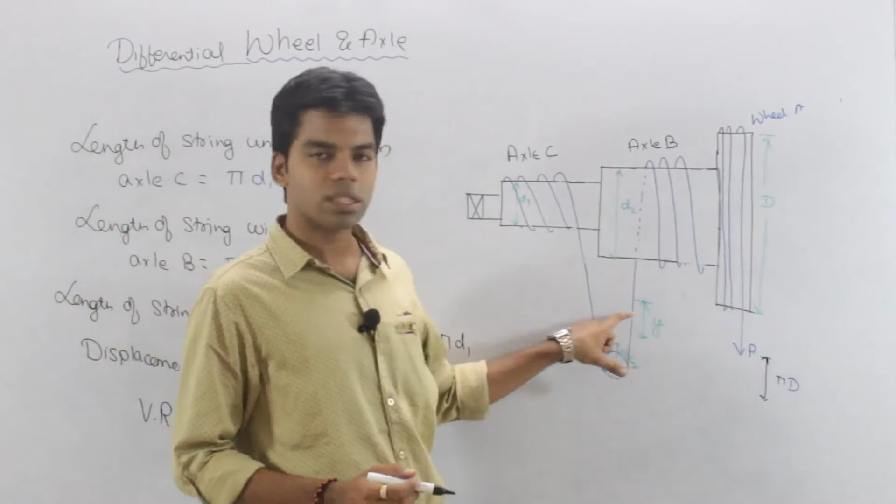The velocity ratio will be equal to the distance travelled by effort to the distance travelled by load. The distance travelled by effort is pi into d. The distance travelled by load is pi into d2 minus d1 by 2. This pi gets cancelled out, so this becomes 2d upon d2 minus d1. So this is the velocity ratio for this differential wheel axle.

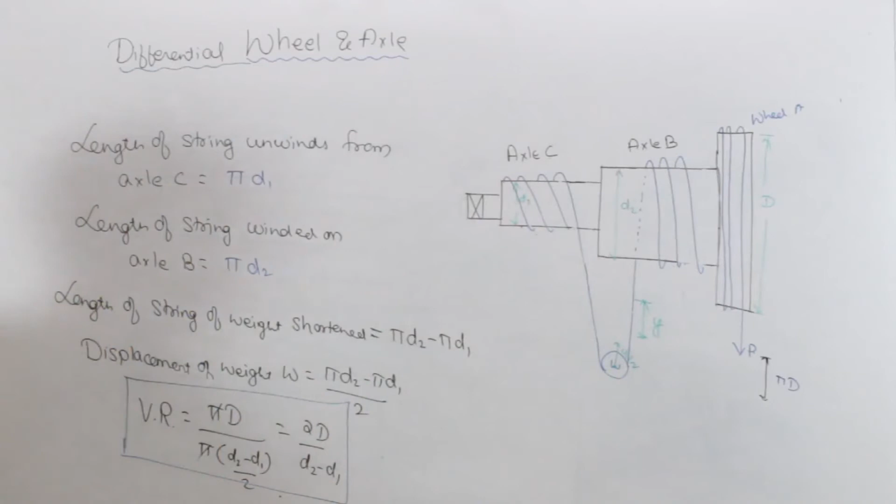So these were a few simple lifting machines. You can see a few more simple machines from your book. There are more machines like worm and worm wheel, winch, crab, differential pulley block, but questions are not much raised from those parts, so we are leaving this. If you want, you can refer it from the book. So this completes this unit of simple lifting machines. Thank you.